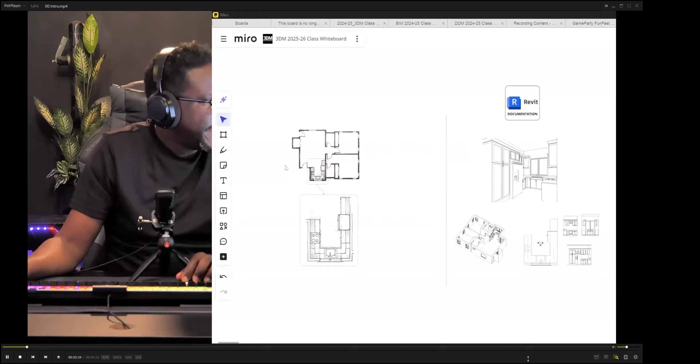Okay, so we have an awesome tutorial today. What we're going to be doing is taking a plan and focusing primarily on the kitchen area. So it's going to be a simple, small U-shaped kitchen. Now what we're going to be doing is developing this in a BIM software, generating floor plans, interior elevations, and essentially generating a BIM model of the kitchen area. Our plan is to design this kitchen in detail according to our design board.

So we have here some ideas for what we want to do with the kitchen. We're going to be taking ideas - for example, we like these lamps, that's going to be over the window. We're going to be taking this barn sink, which is pretty cool. We're going to be looking at the backsplash to be this marble tile, and the combination of colors - this kind of green, gold, along with this light pink floor tile. And for the ceiling, we like this idea of the tray ceiling. So all of this is going to form the basis for detailing our model.

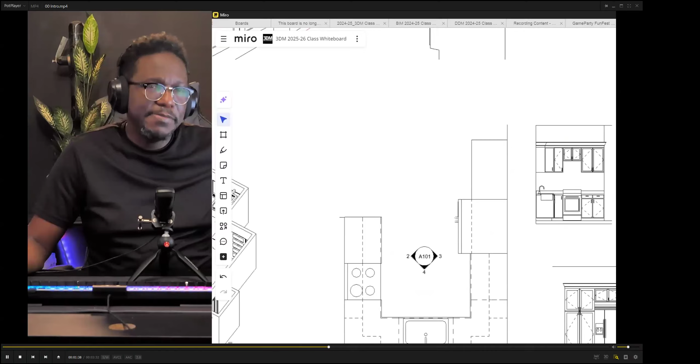So back over to our BIM model. As you notice here, this BIM model is very basic, and the whole point of creating our kitchen in Revit is that we're able to generate our documentation and drawings, which is great. However, when it comes to detailing based on our design board, we're going to move into SketchUp, and this is where we're going to leverage the power of the SketchUp warehouse to get specific types of plugs, types of appliances, types of lamps. We're going to grab the Revit model, take it into SketchUp, and replace some of the flat BIM objects with more detailed objects. That's where we're going to add the sink and all of these things, because most of our BIM model is a representation to give the overall dimensions of our kitchen. However, the kitchen is more than just the overall dimensions - we want to talk about specific lighting and specific types of appliances.

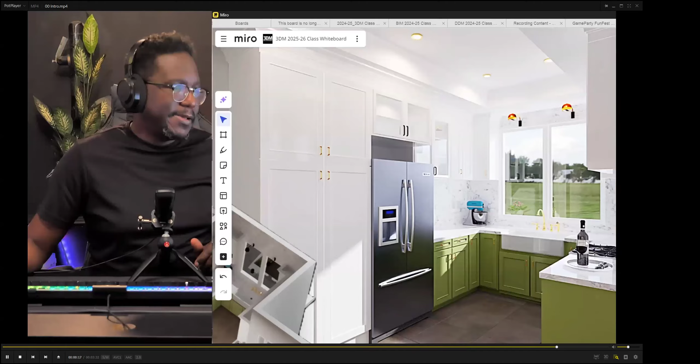So after we detail our kitchen here, then we're going to take it over into Twinmotion, and this is where the magic happens. This is where we're going to be adding things like color, texture - a lot of the color that you see in the design board, this is where we're going to add them. This is where we're going to add decor objects to really bring the place to life. And then we're also going to generate a 3D floor plan along with a few rendered images. So that's going to be our journey today, and it's going to be really cool. So let's get started.

All right. Okay, one sec guys, let's get this show on the road.

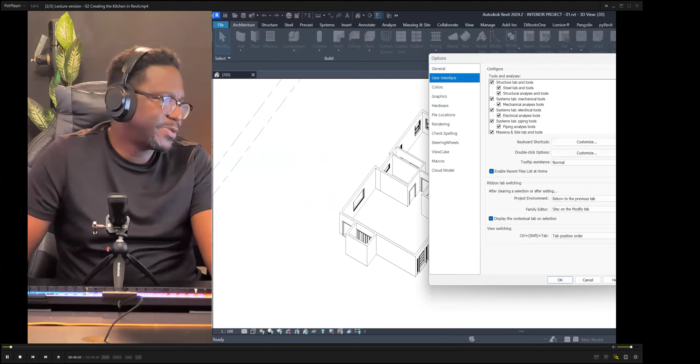So let's get going. I heard some of you have your plans ready, so we're going to dive into some details here and determine how deep we go. We need to cover two things today: the modeling and the rendering, because you'll need that to complete what I need from you in computing. I need you to finish your studio project so you can give me what I need to mark.

If you have your model ready, or at least your plan ready, I suggest you pause and follow along to try to get a grasp on these things, just in case you're not as familiar with Revit, because this directly applies to what you need to do right now in Revit, which is producing your plans. Okay, so let's dive in.

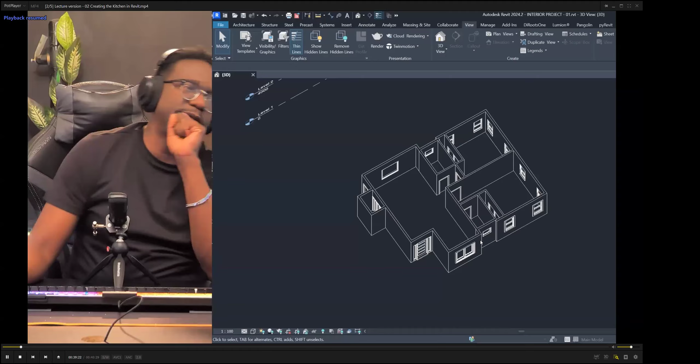All right, so let's continue. One of the first things we're going to do is work on the kitchen area, since that's going to be the most tricky. If we go to a plan view, I'll switch to my level 1 plan. This is the area we want to concentrate on, where our kitchen is going to be. Looking at our reference plan, the idea is to put our countertop roughly in this area, with our stove here, our sink here, our kitchen here, and our pantry in this rough spot. That's the general layout we're going to use, following this reference.

The first thing we want to do is import some cabinetry into this scene. To do that, go to Architecture, then Component, then Load. When this opens, it should default to a specific location. Note, if you're using a metric template in Revit, it will default to the metric folder, but sometimes it doesn't. As you can see, this is defaulting me to the Imperial folder, so check that first. If you're used to metric systems and dimensions, go back up to libraries and choose English, then US — this is now the metric version.

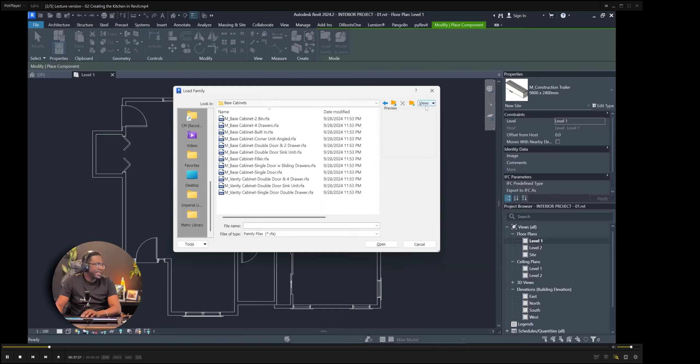We're going to go over to casework, and this is where we see some cabinets. Let's go to base cabinets. You can switch your view over to thumbnails to get an idea of what we want to do here. Great, so what we're going to do is place some base cabinets. Let's grab this one — as you can see, it has two drawers here. This one has no drawer.

This is going to be the one for the sink, so let's grab this one. And then we're going to choose where to put it, so we're going to put that one right here. If you press spacebar, you're able to rotate that, and we're going to drop that right there.

Now from a plan view, you can see just the outline of the cabinet, but when we go to 3D view here, this is where you can get a better look. So we're going to dock this side by side, so that we can see the 3D and have the 2D here at the same time.

All right, great. So now we need 2 corner units here and here. So we're going to head back into architecture, component, load family, and let's look for a corner unit, which we can grab this one here.

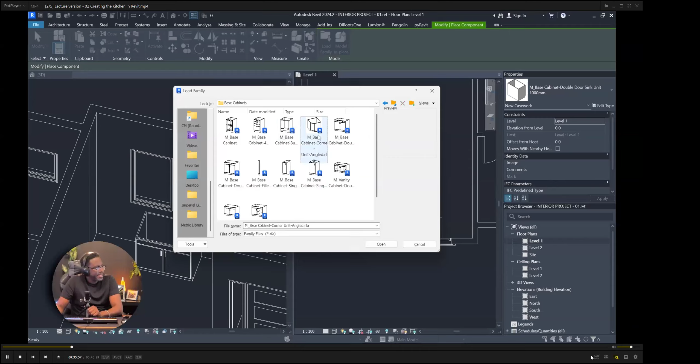Now, before we grab this one here, one important point to note: the metric and imperial templates don't exactly mirror each other. For example, for the metric template, this is the only corner unit we have. But if we head back up to the libraries folder, switch over to Imperial US, go over to casework, and go to base cabinets, you see some other options. The Imperial side has these angular corner base cabinets, while the metric side only has these.

So we're going to use this one from the Imperial set. Doesn't matter which one you use, they're going to come out to be the same size. So there we go, and what we're going to do is just snap that into place. That's right there. All right, lovely.

We're probably going to want these to line up, and in order to do that, we need to go in and change the dimensions. So let's make this side a little smaller. There we go, and let's adjust this. I'm going to use the align tool. Okay, actually we can just drag it.

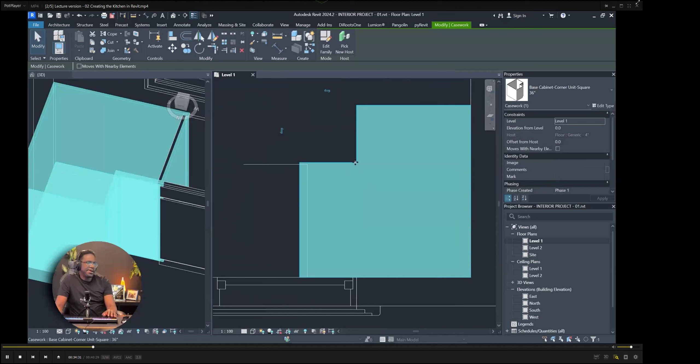All right, so we can see that this corner cabinet is a little large, and also it's not fully aligned with this cabinet here. So if we look in the properties, and then go over to edit type, you can see where we can adjust the height, width and depth. The main reason for this is perhaps because we're using two different units, one metric, one imperial, so that's why you'll see a bit of a mismatch.

If you don't want to adjust this every time, you could just use everything from the imperial set. I tend to do that a lot. So let's go back to component, go to load family, and this time, from the imperial set, we're going to load that cabinet with the one for the sink.

There we go, and you notice now that they're aligned. So this was the metric version, we're going to delete that. And if we work with the imperial cabinetry, all imperial, then everything will line up and we don't have to go into edit type to change them.

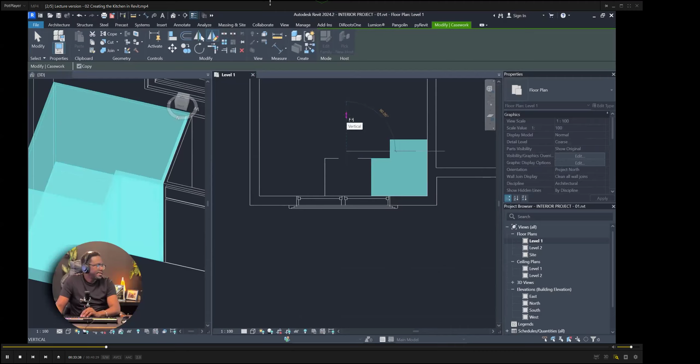All right, so we're going to duplicate this on the other side. We're going to use the mirror tool, and then I'm going to use the align tool to align this here. All right, so now what I want to do is I want this base cabinet to be the full width of this space that's right here.

So I'm going to use my dimension tool and check out this space here. I can see that it's 917 millimeters. I am in a metric scene, even though I'm using imperial cabinetry.

All right, so I'm going to go to edit type, and for my width, I'm going to type 917, and then I'm going to align this. All right, so there we go. We have our base cabinet so far.

Now what we want to do is, we're going to have another cabinet here where we'll have a countertop stove, or we could use an actual stove, a classical stove, whichever version. So let's try the classical stove. So we're going to need to insert another cabinet on this side.

So we're going to go back to component, load family, and we're going to look for one of those cabinets, perhaps one of these base cabinets. We're going to load that in there. All right, now we need an oven, so we're going to go back.

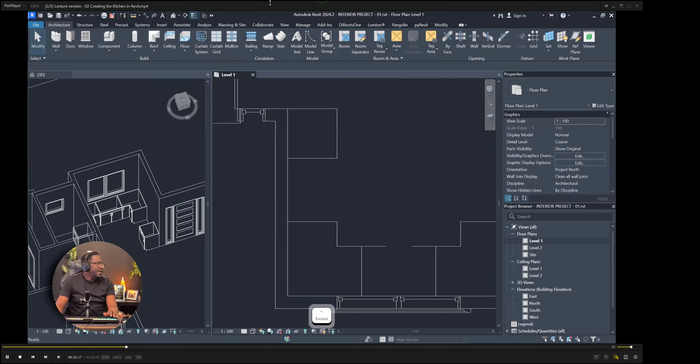Go to load family, and for the oven we would find that under specialty equipment. Then we're going to look under domestic dishwasher. We see an oven top, we see a gas stove right here.

There are a couple options we can pick. Here we go, here's a range, a typical range. So we will grab that one and drop it right there. Then we're going to adjust this to close that up.

So I'm going to use the dimension tool again. So that is 777. I'm going to go into this edit type here and change the width to 777, then go to align. There we go. Now notice all of these are just the base cabinets, and this is kind of how they do things in reality.

In reality, they create the base cabinets before creating the countertops. On this side we want to have a pantry on the left, beside the fridge. We also want to have a hood for the stove and maybe some corner cabinets. So let's start to put those in.

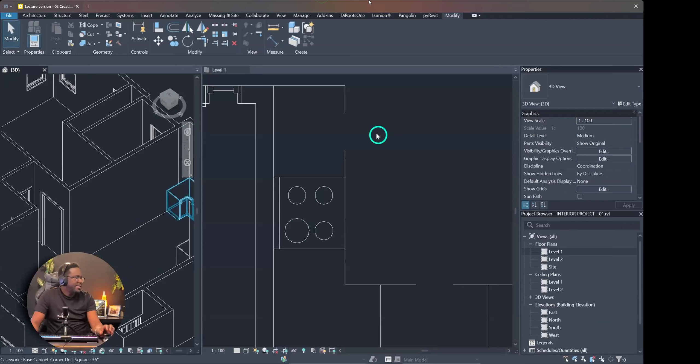Let's see if we can find our pantry. I'm going to go back to component and go to load. Okay, so pantry would be back under casework, tall cabinets, and these are some different sizes. I would use this one. I'm going to rotate that and put that here. That is what it looks like.

Now we're going to want maybe some counter space here, and then we need the fridge. So I'm going to drag this down, and then copy this, CO to copy, spacebar to rotate, and drop this on this side like that. So this is what we're doing here now.

Actually, I think I want to change this to a double door version. So I'm going to go back to base cabinets, and let's look for one that's maybe a double cabinet. I could use a double cabinet with drawers, but this one is good.

Now, because this is actually loaded, I don't have to actually move this. I can see that this is called base cabinet double door one drawer, and I think I want double two drawers. Let's see if that option is there. This is double with two drawers - that's the one that I want.

So what I can do is just go here and swap this out for double with two drawers, choosing this one so I can delete these. Here we go. Now I need to change the size of this one to match it again.

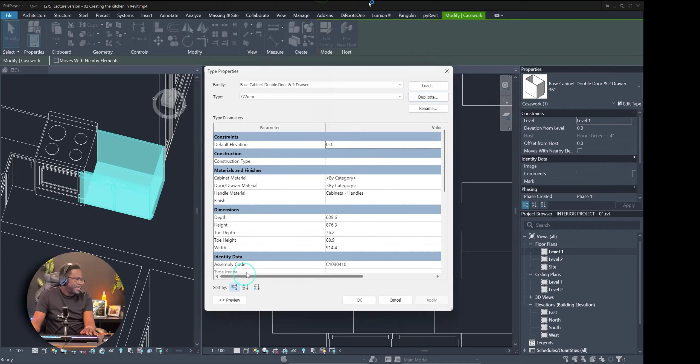It's good practice to always duplicate, so I'm going to duplicate this one and call it 777 millimeters because that's the size I need on that side. So the width here is going to be - there you go. Now I have the double drawers right there.

I think I want to use this cabinet also over here. In reality, whenever you're actually creating this, it's a good idea to repeat the same cabinet in different locations because the construction is much easier, if the design permits. So I'm going to use about the same cabinet on this side, and then I want to have my refrigerator here.

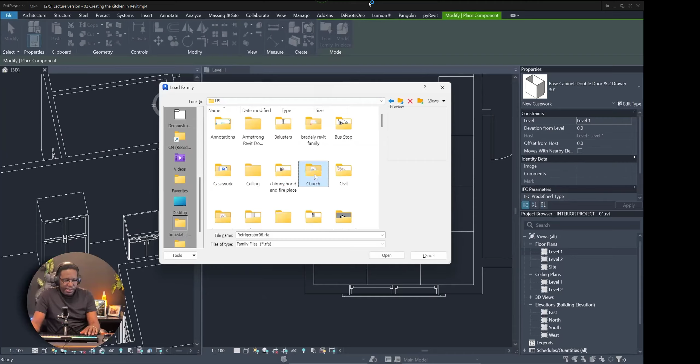So I'm going to go back to component, load family, and back. I'm going to head down to furniture, then kitchens, and there we go. This is a pretty typical fridge to drop in. There we go, and that would be our refrigerator.

Right there. Now what we want to do is have some upper cabinets. So we're going to look for some wall cabinets. We want this wall to stretch above the refrigerator, and we want to have wall cabinets all along the wall here.

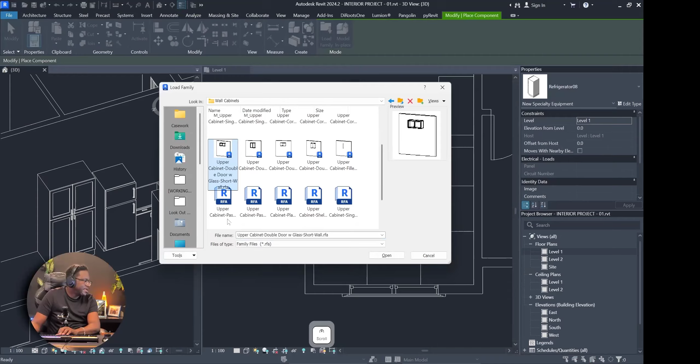All right, so we're going to now look for wall cabinets, and there are some different ones. We're going to grab this one here, this upper cabinet with glass, choose okay, and that one has to be mounted to the wall.

Notice that if I'm not hovering over a wall, you don't see it. So I'm going to drop that one right here, and you can see that's the base cabinet right there.

We're not going to worry too much about details like the fridge style. Usually what we want to do in Revit is get a representation for the purpose of producing floor plans. So if you look at my floor plan now, you can see this is the main objective of Revit. We want to highlight the floor plan and have a basic representation of the equipment.

Now, if we want more custom equipment, like a double door refrigerator that we don't have in our library, we would have to go to another website to find that. There are some cool websites out there. If you just Google Revit Family Library or Revit Family Catalog, you'll find a bunch of websites. One of the more open source ones is Revit City, and it's free to join.

I can just type fridge, and you'll get more options. We can take this large one here, and usually you see a little description. Some will tell you if it's parametric, meaning you can edit it. Fully parametric, side by side, stainless steel, you can adjust height, width, depth, dispenser height. This one seems pretty cool because it's fully parametric, so I'm going to download that.

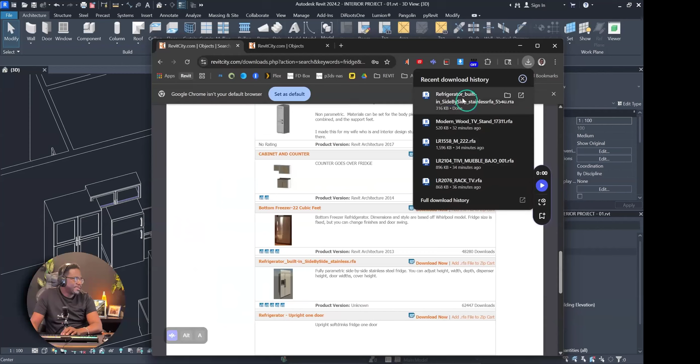I'm going to drag that over into Revit, and it's going to open up in my family editor. I'll say load into... let me see, do I want this one? Maybe this one is a little tall, let's look for some other options. This is the great thing about Revit City, there are usually so many options available. I'm going to load into project and close this time.

Once we have this fridge loaded, we're going to delete this one, press spacebar to rotate it, and drop it in location. We're going to put the pantry right beside it, so this is what we have here. Let's make this a little bit wider. Right, so this is what we have there.

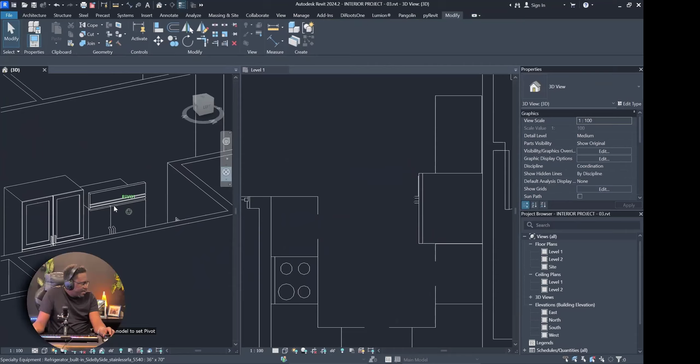Now this fridge has a kind of upper cover, and we can actually change the height of that because this is a parametric refrigerator. If we click it and look in the edit type settings, notice we can edit the width, the height, the cover height — that's this area here — right door width, bottom of dispenser, so we can adjust the height of the dispenser. This is a pretty cool fridge.

Now we need to load our upper cabinets, so let's go back to component. We already had it there, so we're just going to put it back.

Now we need to decide how we're going to do our design here. In some cases, you can have upper cabinets that are very deep, depending on the depth of the refrigerator, and we can do that with this cabinet. Same thing with the pantry, we can make the pantry a little deeper.

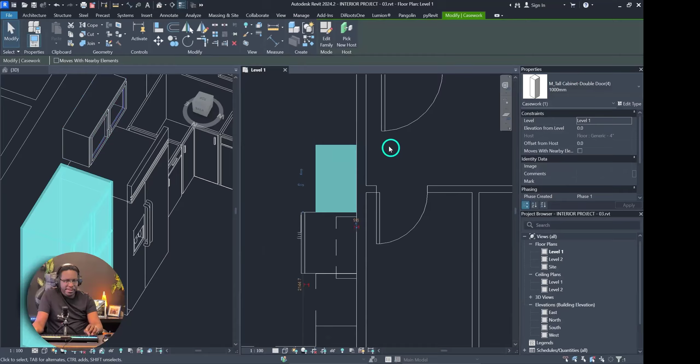What I'd do here is look at the width of our upper cabinet, and the depth. Let's put this back to the wall and take the dimension here. So it's 600, we can duplicate this and say this is going to be 600mm. And then the depth, we're going to make that 600, so now this is the same depth that we have there.

Now the next thing we want to do is make this pantry maybe taller, because ideally we'd want some space at the top of our refrigerator. So what we can do is adjust this top height here. If we go to edit type, right now the cover height is 256, we can make that 150 — let's see if that will work. Right, so now this is actually a little bit lower.

We're not going to worry too much about this because we can change out this fridge if we want. So if the type of fridge we want doesn't have this at the top, we can always change that out later. What's important is that we need to select a height.

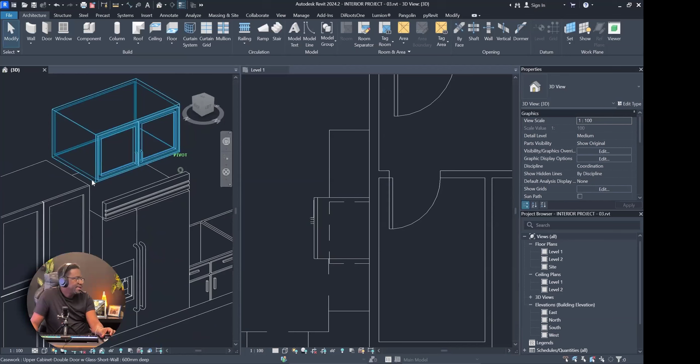So I'm going to work with this, with the height that we have. If I go to my view here, I'm going to draw a section line like this, this way. Notice I get a section marker here. I can click that and look at my section view. So right now, if I go to my dimension tool, this dimension is coming in at 2000.

So let's say we want to use that as our height. What we're going to do is align this here. And then we're also going to make the height of the tall cabinet be 2466. So we're going to go into the cabinet and say height. All right, so there we have the top cabinets there now.

Now we need to have the other wall cabinets on this side and then have a corner cabinet that's going to be there as well. So let's go back to our plan view, and we're going to go back to component and load. All right, so we're going to go back to casework. Remember we saved our folder here, and go to wall cabinets.

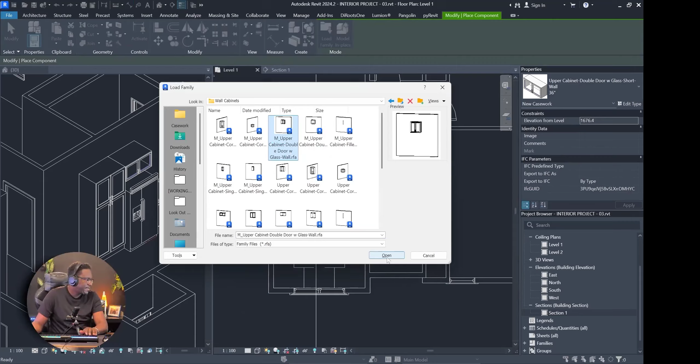Okay, so this one is glass doors, this one is without the glass doors, so we can mix it up a bit. Let's take one with the glass doors first, and it has to be attached to a wall again. So we're going to attach this one here.

There we go, and we're going to manipulate the dimensions of this, and it's good to do this in a section view. So we're going to align this there, and we want this height to be based on real world recommendations. If we take a look back on the Miro board, this is under the tips and guide sections. You will notice that we have some typical dimensions here, some guidelines for kitchens.

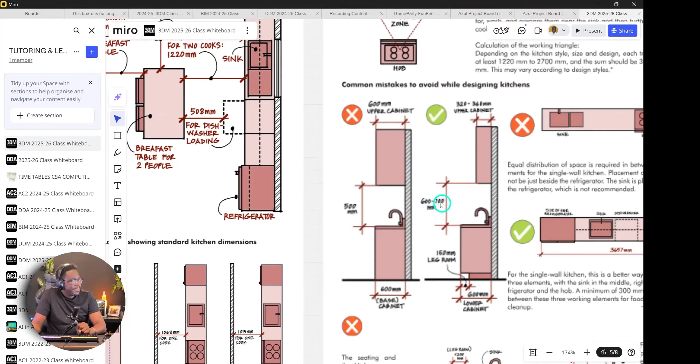We can see that you don't want the height of this to be 500 millimeters. You know, we don't want it to be 500, if you can see here. Instead, we want it to be between 600 and 700, which is what is recommended here. So let's make this 700. What I'm going to do is put dimensions here, and we can make it 750 just to be on the safe side.

And now we're going to change our scale to a little bit smaller. That will make our text smaller. All right, and we know that we want the height of this to be 839. So we're going to go into edit type and duplicate this, and we're going to make this 839 height. All right, there we go.

We also want the width to be the width of this cabinet down here, so 780. So we want the width to be 780, and we're going to align it. Okay, we need to change the width of this one as well to be the width of the space for the fridge. So now in reality, we might want to let these spaces be wider, like to give it a 2-inch buffer around the fridge and the stove, right?

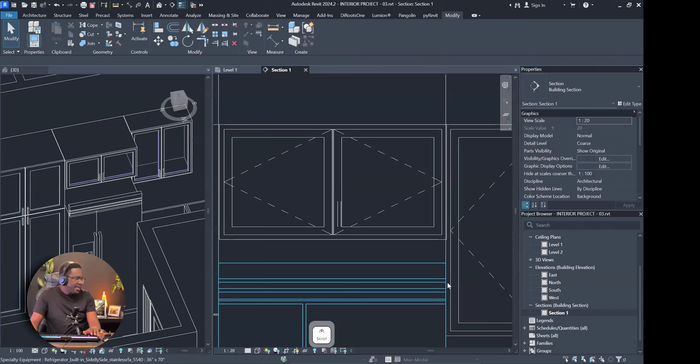So remember that. This needs to be 908. So we're going to change this width to be 908. In this case, we're just going to make it the exact dimension, so we're not going to worry too much about that buffer. All right, lovely.

All right, so now we need to work with the corner unit. We want to put a single unit here and then the corner unit. If we take a look in 3D, this is what is happening. All right, so let's go ahead and load a component, and we're going to load a corner unit, wall cabinet, for wall cabinet corner square, or we could load this angular version. Let's load the square version.

Let's use a plan view to get it in, so we know we want it to be there. All right, and then we're going to need one in this space here. So let's go back to our section view. We already know that we want to align this like that. We already know that the height we want to be 839. Okay, this, always a good idea to duplicate the default cabinet.

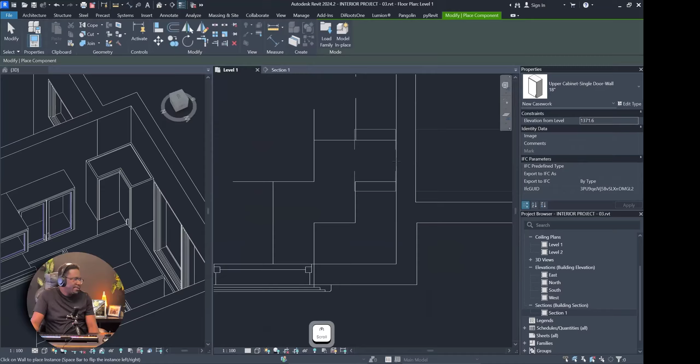There we go. Then we want to fill this space here, so we're going to need a single cabinet that needs to be 303. So we are going to load another one. Maybe we can load a non-glass version. Let's go to our plan view and we're going to load it right here. Let's go back to the section, align this.

And we know that this needs to be 839 by 303. All right, there we go. So we pretty much have everything on this side. We're not going to be putting anything where the windows are.

And we're pretty much going to be putting this same thing on the other side. So we're just going to choose this option, which creates similar, so we can create a similar one on this side. Same thing for this, and we're going to leave a gap here, and put another glass unit here.

I think we need to adjust this a little bit. Right, there we go. All right, we need to double check some of our measurements here just to make sure that this is accurate. So our width needs to be 707. There we go. And we also need to fix the depth, so we want it to be 305 in depth.

That's good, and let's adjust this one now. And this needs to be 308 actually. Let's rename this 308. And then we're gonna align this.

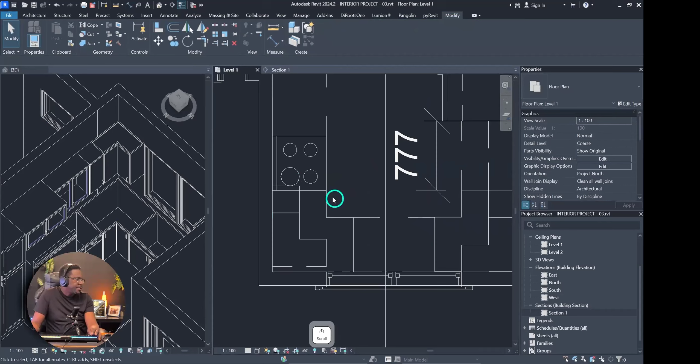All right, okay, so on this side here, we want to put another cabinet over here. So on this side, we can get that there. All right, now we need to align the heights of everything.

So we can actually use our section and we can flip it to this side. The elevation from level, which is 1676.4, needs to be the same here. There we go. And we're gonna align this to the wall and align this cabinet together like that. All right, same height for these guys here.

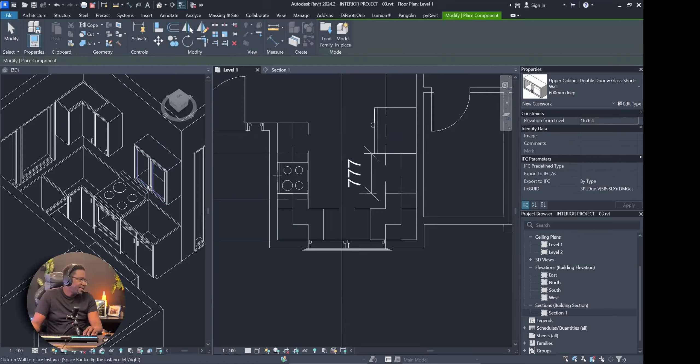Okay, now we need another cabinet here, perhaps with a hood below it. So we're gonna grab the same cabinet that we have over the fridge and place it on this side. But of course, we're gonna resize it.

So from a plan view, we know that we want the depth of that cabinet to be 305, and we want the width to be 610. So we're going to duplicate this and say 305 by 610, that's what we're going to name it. Then we're going to align that, and let's use our section view here.

All right, looking good. Now we could have a microwave here, along with a hood. So let us look for that. We are almost there with our kitchen. Looking pretty good, all right.

Okay, so what we need to do is to go back to Revit City, and I found a nice microwave here, and to download this one. All right, so I'm going to load this one into the project. All right, we're just going to drop it right there.

Oh, there it is, it's actually right here. So we're going to align this right there. There we go. All right, now we're gonna try this one. Let's try the width, 607. Okay, good, and the height, 382.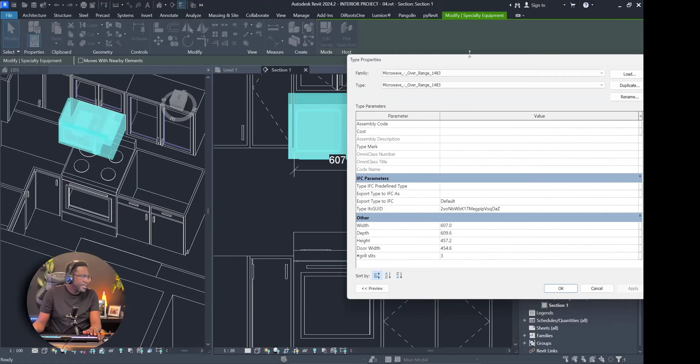Let's make it a little smaller than 382, maybe because we need space for the hood that's gonna be below it. Actually, no, we're gonna leave it at 382 height. Let's see if that works.

All right, great, actually I think these cabinets are possibly too high, so we might need to adjust that. But before we do, let's put our microwave in. Great, all right, let's go from the plan view.

Oh wow, the depth is quite big, so we need to change the depth to maybe to 305. Let's see if that works. Oh, this one, let's see if the arrow will still take us there. Okay, good, it still works. That's good, all right, so now our microwave fits in lovely, and we pretty much have our kitchen cabinetry.

All we need now is the countertop and the sink, so let's go ahead and do that. So we're going to remove these dimensions here.

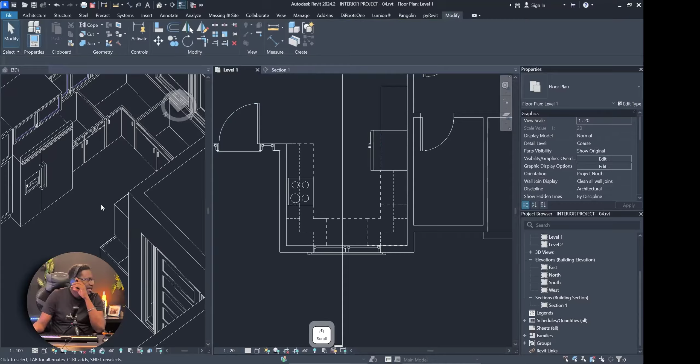All right, now for our countertop, we are going to need a component. So we're going to go to load, and we are going to go to, again, this time we go to casework and countertops. All right, so we have some options here. We have the L and we have the sink, so we need these two.

So we're gonna load these two. Oh, we only can load one at a time. Okay, so let's load the L first. It's actually here, let's align this properly.

And we can actually adjust this in real time, so align. And for this side, we're gonna align it to here. And then we're gonna mirror this, mirror copy. We're gonna push it all the way to the back. There we go, in this case, we need to adjust this way.

And then we're gonna need another counter, so we're gonna go back here, go to load family, typical countertop.

And then we need to load the one with the sink. Here we have one with the sink. Put that in. We are going to try and move this to the center.

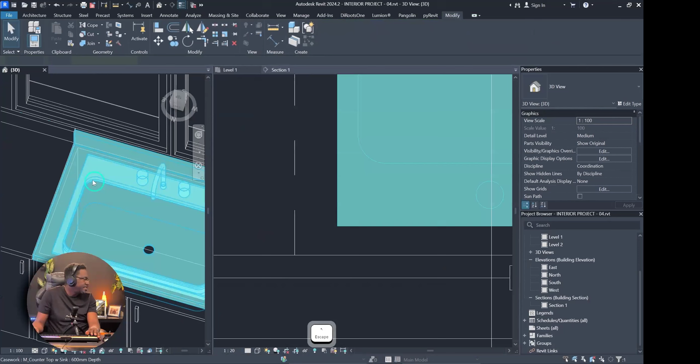There we go. Now this height is a little different and the depth is a little different, so we need to change that. The height here is 914.4, so we need this to be the same height. There we go, that's good. We also need to adjust the length, so the depth is 635. So this depth needs to be 635. All right, there we go.

All right, and if we look there, you can see that we have our kitchen pretty much completed.

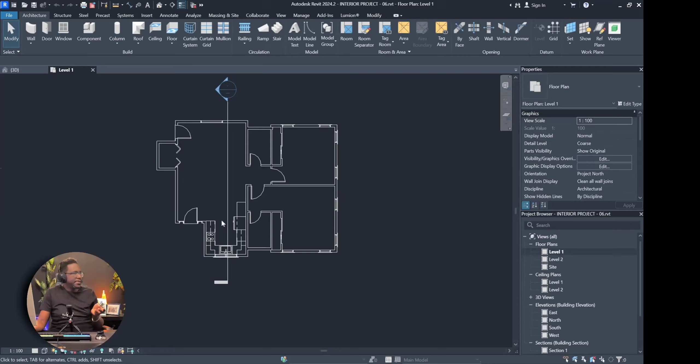Okay, so now that we have our model complete, let's talk about how we can set up the sheets to have our drawings laid out for plan and our internal elevations. So what we want to do now is go to the plan view, and if you remember, we had drawn this section here which we were using to help us out when we were creating the cupboards. Now we're not going to need this anymore, so we're going to delete that, and that's fine.

And what we're going to do is create a sheet that we can have for our floor plan and interior elevations as well. So one of the first things we're going to do is create some interior elevations, and we also need to create some sheets. So I'm going to scroll down here to where it says sheets, and I'm going to create a new sheet.

Notice that I have a default sheet here. Now if this is not the sheet that I want, I'm going to go to load, and I'm going to be taken back to my Revit library. I'm going to look under title blocks, under annotations, then title blocks, and here you will see some different sheets. So I'm going to take the A2, A3, and this is the A4 vertical—maybe the A3—and I'm going to open that up and choose OK.

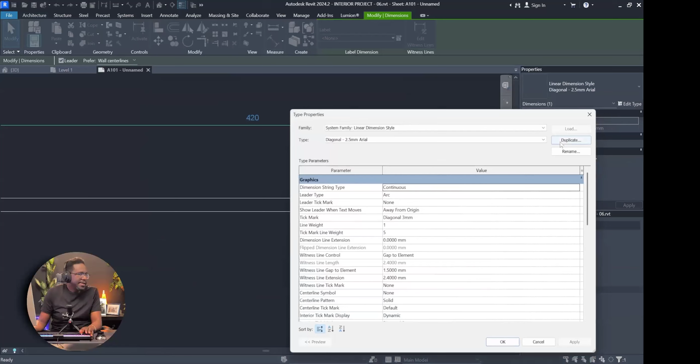All right, now this is an A3 sheet, and we can use the dimension line and draw a dimension here to get the idea of how big this is. This is in millimeters though. If I go here for my dimensions, I go to edit type, and I can say show me alternate units below, and show my alternate units to be inches. I can use the inch symbol, it's okay. Right, so you see that this is 17 inches by 12. So this is 12 by 17.

Now, regardless of whatever template you choose, it doesn't matter. If you did not have this particular template, it doesn't matter, because we're going to pretty much create our own. So what I'm going to do is edit this template family, and I might want to keep some of these, but maybe not all of them. I'm going to keep project name, sheet name, and scale—I'll keep all of these. Probably the sheet name and drawing scale. Now everything else I'm pretty much going to delete, and I want to make this size here to be a letter size. So I know that in order to do that, I would want to enable alternate units for this one as well.

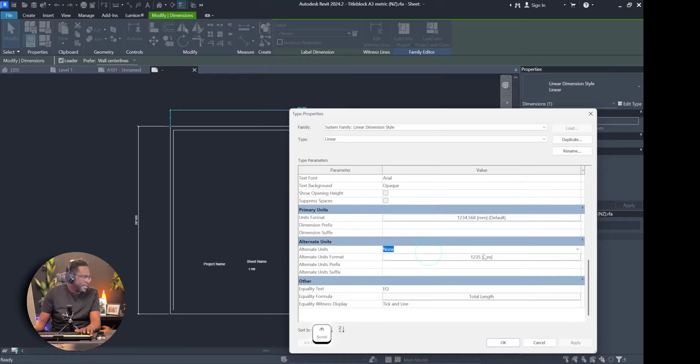So I'm going to say alternate units below and show me inches. There we go. Right, so I know I want to make this here 11 inches, so I'm going to say 11. And for this one here, I'm going to say 8.5 inches. So I know this will be the size of our letter size. Now I can just get rid of most of these lines, and I'm going to keep the project name, the sheet name, and the scale, and that's it.

Let me delete these, and this is going to be my new sheet template. I'm going to save this family, so I'll go to save as family, and save this one in the folder I'm working from. I'm going to create a folder on family, and name it there, and I'm going to call it title block letter. So there you go.

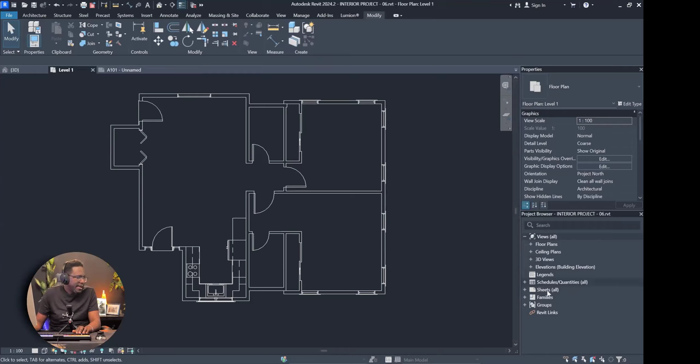And I'm going to load this into my project. So now if I go to sheets here, I can click on this and change it from title block A3 to title block letter. I'm going to delete these dimensions now, so now I know that this is letter size, which is great. Regardless of if you have the title block family that I have, I never used it anyway. I just deleted it and created my own. So this is all we want to do for this one.

Now what we want to do is drag the floor plan. So I'm going to expand floor plan and drag level 1 onto my sheet here. You'll see that this is 1 in 100 scale. Now we want it to be large enough just for our kitchen, so we're going to click on this window here and change the scale to a bigger scale, maybe 1 in 25.

There we go. Now the next thing we want to do is crop this down. So we're going to double click this, show our crops here, and crop this down to just the kitchen. There we go. We're going to double click back out, and then put this on our letter size sheet. We could probably crop it down some more, let's crop it all the way to the wall, and let's leave that window intact.

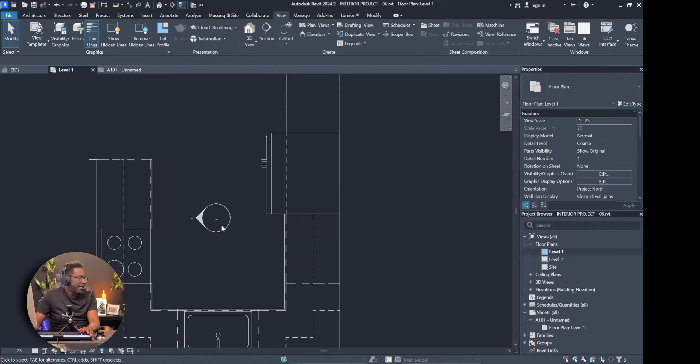What you have to do is click on the circle, and that part is going to be important. You need to click on the circle and not the arrow. So clicking on the circle, we want to enable this elevation and enable that elevation. Now we don't want to enable this one because we just want to see these three elevations. Once we enable them, if you look over here under elevations, you see that they are already created. So if I double click this, this is what that elevation looks like. Then we have this one, and then we have that one. So all these elevations are already created.

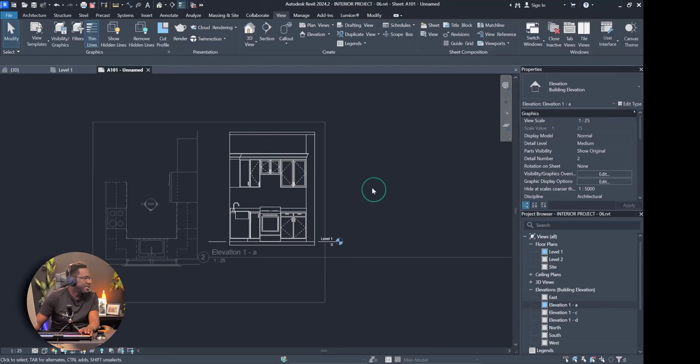Now let's close these. We're going to go back to our sheet here, and let's drag the first elevation onto our sheet. Right away we know that we just want this part of the elevation, so we're going to double click, turn our crop on, and crop this all the way down here, just to there, because we're showing internal elevation, so we don't need to show the wall section. Maybe just to here where we can see the top of the wall. Now we also have a title here. We can leave it right there.

How the title works: if you click on the image on the viewport, you will see the end of the title line comes up, and then you can just drag that and position it on your sheet. Now, if this is too big, what you can do is make it smaller. I can click on this and make it 1 in 50. So there is one elevation, that's right there.

I can choose if I want to have the title or not. If I click here, I can choose the viewport that says no title, and then it won't get any title.

All right, now for the other views. I want to do the same. I can drag this view out, click on it, change it to 1 in 50, and adjust my boundaries. There you go. Let me turn off the boundaries here.

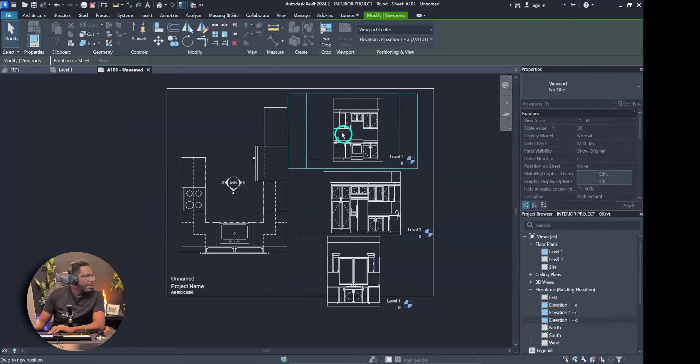Let me do the same thing for this one. Let me turn the boundaries off, and I'm also going to say no title for this one. And then my last elevation, I'm going to drag on here, which is going to be this one. Same thing again, I'm going to set that to 50, adjust my boundaries, and say no title. Now I could probably put these two side by side, perhaps.

And maybe what I want to do is disable the level. So I'm going to right click and choose hide. Same thing for here, hide, and same thing for here. So there you go. Now I'm also going to change this canvas theme to white, because this looks more like a drawing. All right, so that is pretty much it.

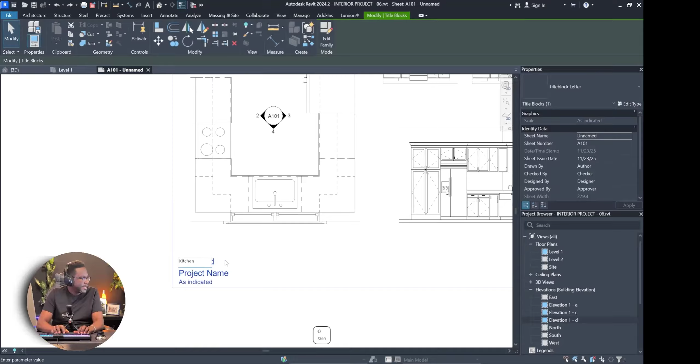So that is how I would get my internal elevations. And if you notice, your internal elevations is already telling you that elevation 2, 4, and 3 is located on sheet A101. So this is good stuff, and I could go ahead and name this sheet. I could call it Kitchen Elevations, or I could just call it Kitchen Design.

Now, the thing we must understand is that doing your drawings in Revit isn't about trying to detail exactly what these cupboards will look like. Revit gives you the ability to have your drawings laid out in a way that works for documentation. So at this point now, I can start to add things like dimensions and labels and all of that stuff.

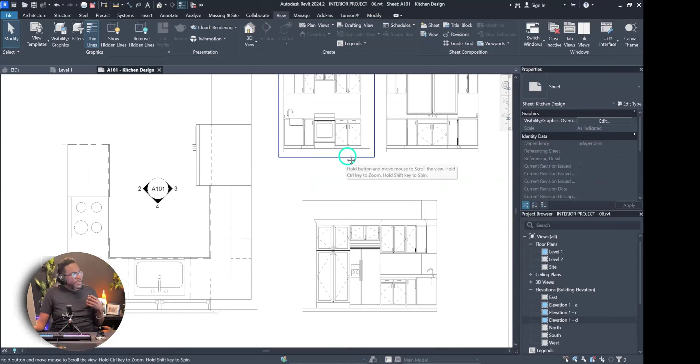However, when you're doing a kitchen design, you might want to go in more detail - for example, what type of handles are we using, what type of stove, what type of sink. Most of the furniture and cupboards we selected here are pretty generic, and that's the idea of using a BIM program. Now, the next stage will be adding those decorative details to the kitchen, but doing that in Revit would be mostly difficult, because Revit is really made for you to generate construction documentation. The next layer we'll add to this will be decoration and detailing.

All right guys, so that was just a quick demo now of using Revit, specifically in your case, which would be to lay out your plans. Now, I just laid out the kitchen area, but you guys would just do the same thing to lay out your living room, bedroom, and all of that.

Any questions from anybody so far? Guys? Is there, do we take a little slow down, catch up maybe? Can you slow down for us to catch up a little bit? Oh well, sure, we have to balance it, because A, the video will be available, and B, we have one more thing to go through. So, you have any specific questions about what you want to know? Nah, not really sir, it's just trying to follow. I know that I'm going fast, but we have to kind of do that because we have to cover this in this class, right?

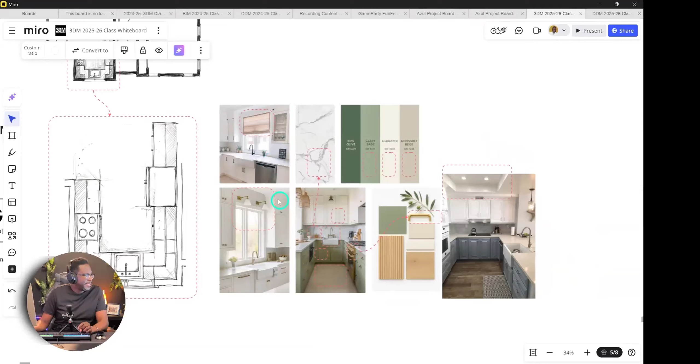So after we achieve the general design, looking back at our design board, there are some specific things we wanted to do. For example, we wanted to use specific lights here. We wanted to have this particular sink, and we wanted specific handles.

We already selected the type of handles we want to have, and we wanted to represent the type of equipment. Notice this is gold-plated, and the faucet has a particular style. The knobs have a particular style, and the cupboards also have a particular look.

So this is where you need to balance between using a program for drawing documentation and a program for detail designing. Revit will give us the overall dimensions for our kitchen, but it won't give us the exact decor or the exact cupboards that we plan to use.

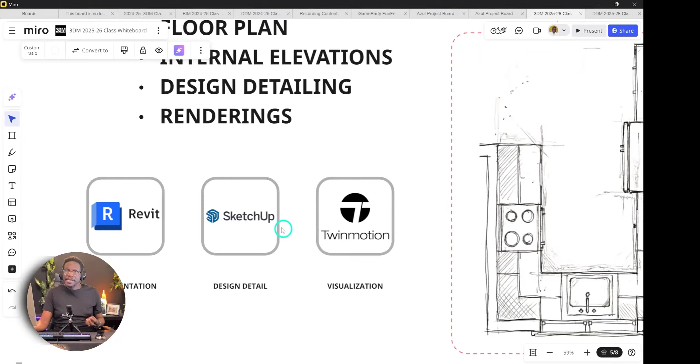Now we could use Revit to do that, but what we'd recommend for this workflow is to go into SketchUp to put in some of these special decorations for our kitchen. After that, we're going to take it into Twinmotion, and our renderings will look quite nice because we'll have added all of those details from SketchUp.

So let's go ahead and jump into SketchUp so we can start adding some of these details from our Revit model.

Now back in Revit, what we plan to do here is export this as an IFC, and that's how we're going to take it into SketchUp. So we're going to go to File, Export, IFC, and we'll get this dialog box that comes up. We can leave pretty much everything at default.

We're just going to browse to choose where we want to save this file. We'll save it in IFC exports and call it Interior Project 06, then click Save and choose Export. Now once you do that, the IFC file is there, and SketchUp can read IFC files pretty well. So what we're going to do now is jump into SketchUp.

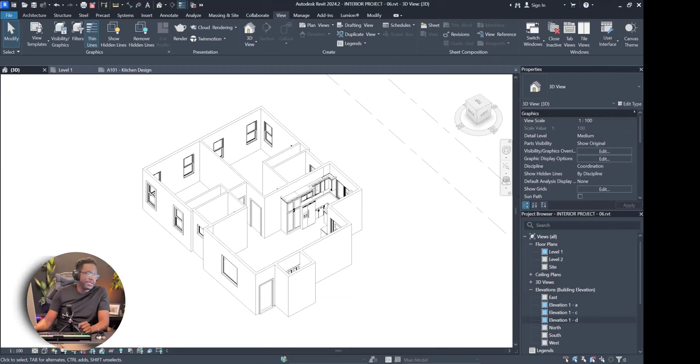Okay, so once we open SketchUp, we're going to get presented with the welcome screen. Now this that I'm using is SketchUp Pro. When we look at the different units we can use, we're going to choose millimeters to be consistent with our model, and it's going to open up like that.

Now your SketchUp might open differently. Notice I have all of my tools here because I've gone into View, Toolbars, and I've enabled a large tool set. All right, so the first thing we want to do is import our model.

So we're going to go to File, Import, and we're going to go to our folder and choose Interior Project 06, and we're going to choose Import, Close, and there you go. So this is our Revit model now imported into SketchUp, and you can see SketchUp did a pretty good job of importing it. You can see the scale is pretty much on par.

And now we can really use the freedom of a modeling program to add in any finer details that we might want. Because this is inside, one of the first things we want to do is go to View or Camera and adjust our field of view. I want to pull that back so we can have a bit more to look around.

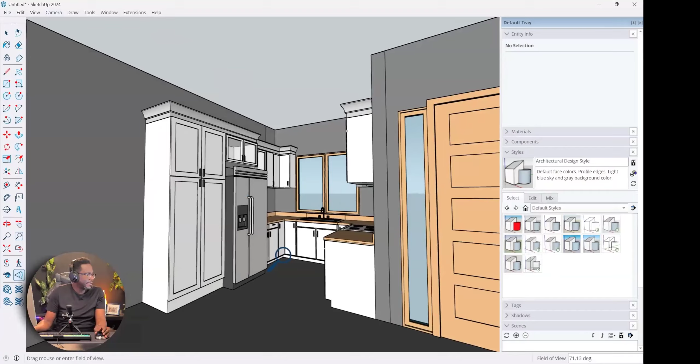Now we're only going to be concentrating on the kitchen area. I want us to take a look on our design board that we had here, and if you notice, we had actually picked out some ideas that we want to execute here in the design board. So one of the first things is that the type of cupboards Revit has is very plain, and we definitely wanted to use this kind of style.

So the advantage of being in SketchUp is that you have SketchUp 3D Warehouse at your fingertips, which is a great resource we can use. If you head over and just type 3D Warehouse and look for it in Google, it will be the first thing that pops up. Now you do need to sign in, which is free, so you can just make an account and sign in.

For example, we might want to look for cabinet doors. We do get a couple of options here, and we basically just want to look for a cabinet door that looks like the style we would use. Here are a few here, cabinet doors. Let me see if this one is okay. I'll just click here, and we can click download, and then we can actually just drag this directly into our model like that, and we can inspect these cabinet doors.

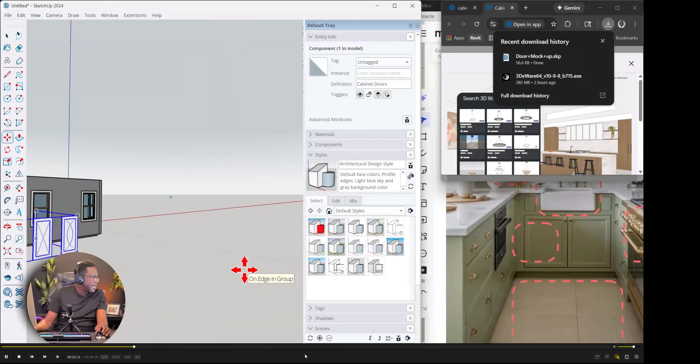Let me look around here. They're okay, but not quite the cabinet doors that I would want. So I can just undo that and we can continue looking. I'm going to hit back. Oh, I can go here. So this is basically the process that we would do, we would try to find cabinet doors.

So if we look around, we can see this cabinet door is pretty good, so I'm going to download this one and drag this one in. And this is actually looking pretty nice, it has a little bit more detail that you can see here. This is the thing that will let the renderings look really nice because it has these details. Now you can see that the default cabinet from within Revit doesn't have that much detail.

So the other thing you might see happen when you're in SketchUp Warehouse is after every 5 downloads, it will pop up a message saying you've reached your daily download limit. Basically, you just need to watch the first part of an ad to get more downloads. So when it says you've reached the limit, don't think you can't download anything more for the day. You just need to play the ad, it's basically advertising SketchUp, and as soon as it reaches about halfway, you can skip it and then you have 5 more downloads.

So, of course, SketchUp is just encouraging us to purchase a subscription. But you don't have to purchase it, just know you have to skip the ad. But we're all used to this already, right? That's how the world of cell phones works. When you download any free app, you know it's coming with ads.

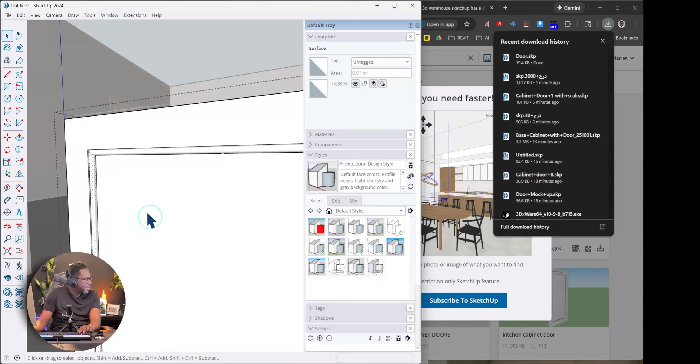For drawings, that's no problem, but if we're doing a presentation, we need more detail. If I double-click this, I see it's one group, and this inside part is another group, so we're going to merge all of that together. I'll double-click and explode this group, so now everything is one group, and I can adjust this by moving one side, keeping everything proportional.

So now I'm going to use my move tool and just move this into place. I'll put it about right here, right here, let me put this here. Then I'm going to rotate this so it's exactly there, and then adjust this. I'm going to select this side here.

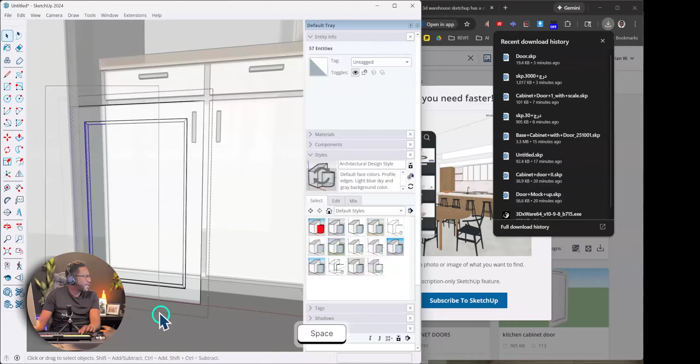If I can't see through this, I'll go to View, Face Style, and change it to X-ray so now I can see it. I'm going to use Move, drag this over to there. I left a piece behind, let me go again. I'll select everything and drag this over.

I have some pieces here, I'll just adjust, and that should be okay. I'm going to leave that part there because that's inside. Now I'll go to View, Face Style, and turn off X-ray. So now I'm going to replace this, I need to carry up the bottom part, like that, there you go.

Then I'm also going to adjust the depth. Here is the back, I'll double-click and push this flush like that. Now all I need to do is replace the Revit version, so I'm going to copy this and press Ctrl to copy it over.

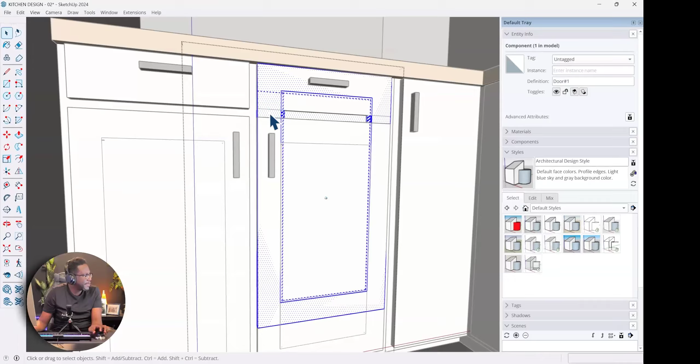There you go. I also have some drawers that are going to be up here, so now I'm going to move this, copy this, and this is going to be for the drawers. Here. Now I want to make this unique because I'm about to change this height, so I'm going to change the height. Notice the drawer is a bit more slim, so I need to make this a little smaller, using an exact measurement.

So I'm going to move this about 30 millimeters, and do the same down here, moving it about 30 millimeters, same for this side and same for this side. Then I'm going to move this all the way up, there we go. Then I'm going to copy this one over here. Now let's see how that's turning out.

So I'm going into the group, the IFC group that came from Revit. Everything is grouped together, so I'm going to right-click and say explode, and explode again because they're grouped multiple times, and explode again, and everything is still grouped, so explode again. Now I'm able to go into each object.

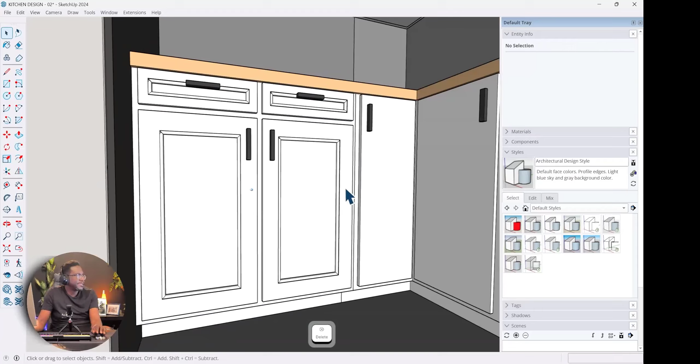So now I'm going into this object that's here, and if I delete, oh well, it's going to delete the cabinet. So I need to go into this and say explode, and now I'm able to delete each cabinet. So now I'm left with this along with the handles.

Also, another point, when you export your model as an IFC into SketchUp, IFC will not take everything sometimes. In this case it took all the cabinets and everything, so that's good, but I believe some items like curtain walls and some types of furniture, for some reason the IFC doesn't read. So that's a point for you to note.

All right, cool. I'm also going to delete the handles as well because we're going to be using our own handles. So we can see that this kitchen here is looking much more detailed, and if we take a look at our design board here, you can see it's looking similar to what we have for our kitchen design board.

But now, before we go any further, let's put on our door handles to match what we have in our design drawing. We want to use these types of handles, so we're going to look for that, and if we type door handles, should be able to, here we go. So we're going to download this one in, and then we're going to move that into place.

So we're going to use the move tool and just place it there. Now, of course, it's a bit oversized, so let's rotate that 90 degrees, and we're definitely going to scale it down. I think it comes out too much, so we need to take it inward on this side.

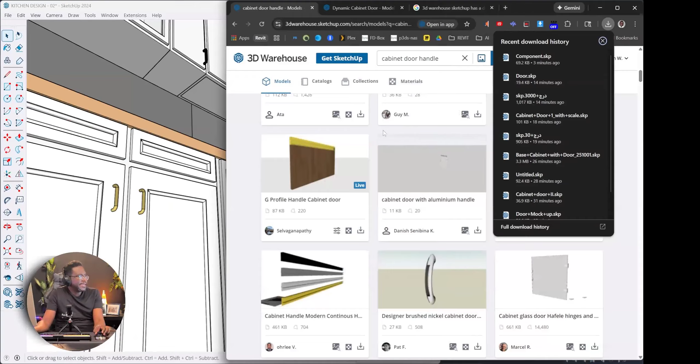Now we're going to place these handles on our door. Still a little too big, so we're going to scale that down. There we go. We're just kind of eyeballing it a little bit, so we're going to copy this over here. And that's okay, because what we're doing is trying to design this in detail, based on our design sketch that we have here.

So we are using these cabinet door styles, but we want to use this type of handle. Now, as you can realize, Revit would not give you this design flexibility. So this is why we would do this using SketchUp, so that our kitchen can have some nice details for our rendering.

And then we're going to copy that over here. Doesn't matter if it doesn't line up 100% with the center. This is okay, it's kind of a sketch. Now, if this is looking like what we want, then we would want to select these two here.

We would actually cut this, go into this group, and then paste in place. Let me delete this. So what happens now is that these are exactly the same because we've added this to the group. And then we can mirror this that way, like that.

And we can do the same thing here. We're going to cut this, go into this group, and then paste back in place. There we go, so now these are grouped. And now we can pretty much duplicate these in different locations.

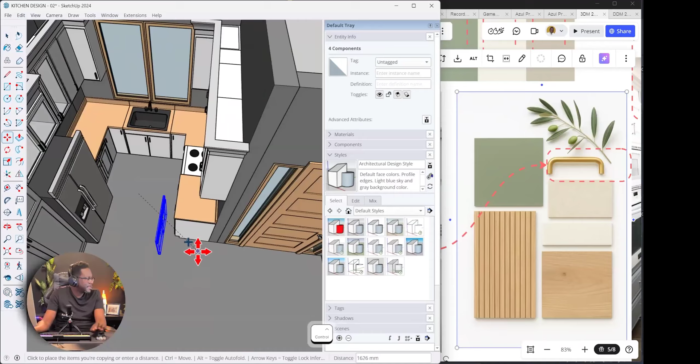So we have a similar cabinet on this side. The first thing we're going to do is copy all of these doors. Then we are going to flip it, using the flip tool there, and then move it in place right there.

There we go. Then we're going to go into this group and explode it, and then delete the original doors. All right, that's looking pretty nice. Now let's go ahead and do the other doors.

So we're going to replace this one here. We're going to copy this, and then right click and make this unique, and move this side in. We had to make it unique, or else these would have edited over here too.

Select this here, and then we're going to move this upward. There we go. And we're going to explode this and delete this door. So now we have that.

And now we're going to do this, and we're going to do this side here. So we're going to make it that way, and then rotate it, and then move it in place.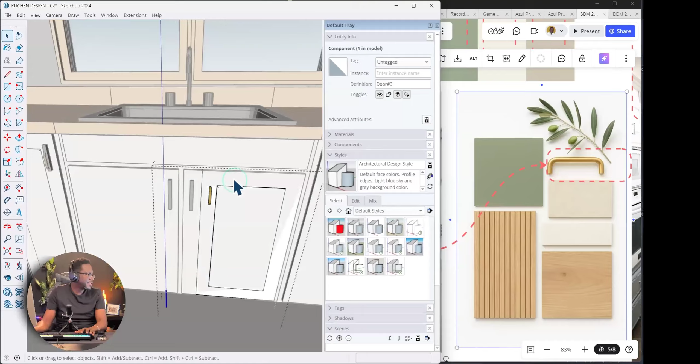Great. Now we're going to do the same thing for these guys here, and these are a little bit bigger. So what we can actually do with this one is make it unique, and then extend it. Then we're going to mirror copy, so we're going to press Control and then mirror.

Actually, we're going to click, hold, and drag this to the center point and then release. And then we have a mirror automatically.

Pretty cool. All right, then actually for here, we're not going to edit this just yet because we're going to edit the sink, and that might change this part. So we're going to leave that for now.

We're going to change these ones up here. Copy that, mirror this way, and then mirror it that way. Then I'm going to make it unique.

All right, then we're going to do this one. We're going to rotate this, and create a rotated copy. There we go here. And then we're going to rotate this, copy.

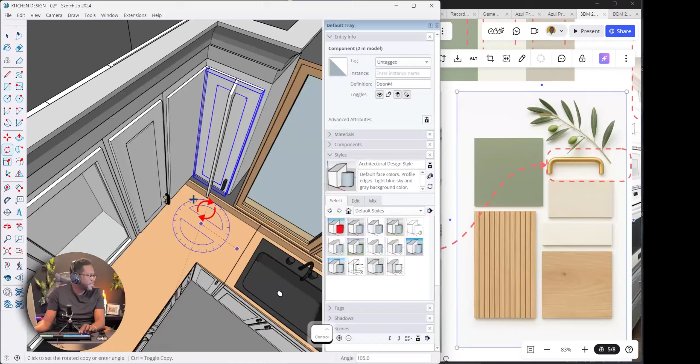Okay, all right, so let's delete these doors. We're going to explode this and then delete that, and delete that door. And I believe all of this actually rotates.

So we are going to make this unique, and we are going to move all of this and do the same thing for this one. Then we're going to remove that. There we go, all right, so that's done.

For these, we could choose to replace these low detail versions, but it would look pretty similar. Let's finish these over here. So we're going to select all of these. We have this one remaining. We're going to grab these guys here, make one unique, grab the back of this guy and push it all the way there. Then we're going to mirror this, copy this upward, and make this unique.

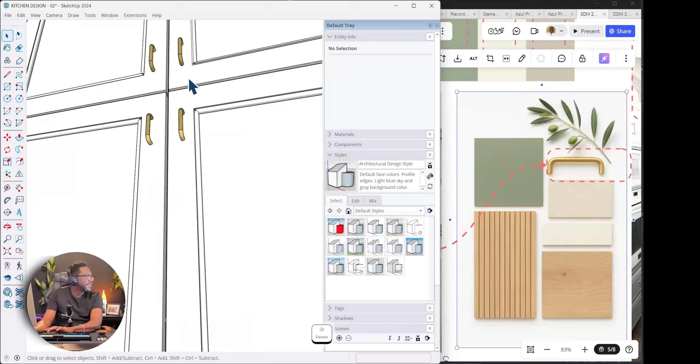That's good. Then we're going to mirror this on the other side, using the midpoint to mirror copy. There we go. Now we can explode this cabinet and delete. There we go, that's looking nice.

So we've went through - hold on, we have to do one more. This guy here, we're gonna explode that and delete that, and we need to replace it with this version here. So we're going to mirror copy this. All right, that's good. So we can see we have added some interesting details to our kitchen.

It's looking much nicer. Okay, now we need to change out some of the fixtures. We have a fridge here, and we have a stove, so let's look up some stoves. Okay, now we're gonna look for some stoves.

If we type the word stove, we'll see a bit here. This looks a little big, this one might look good. So we're gonna download this one and drag that in. There we go. We're gonna delete this stove and replace it with this one here. It's a bit nicer, all right good.

Now this might be a little shorter, so we're just going to make this a bit taller like that. And what we can do is adjust the feet. I'm just going to carry this down and then carry up. There we go, all right, so we have our stove in.

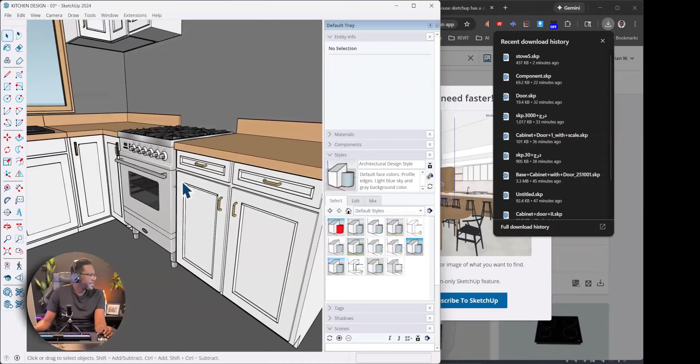All right, so let's look at our sink now. This type of sink is called a farmhouse sink, or an apron sink. So let's do a search for that. We have quite a bit of options here. Let's look for farmhouse sink, see what that gives us.

All right, great, so we're gonna download this one, and there we go. Basically what we want to do is replace our sink that came with Revit, so we're gonna delete that. We're gonna delete everything, leaving the doors, and try to fit this into that space. So we're gonna grab this. It may not fit exactly, but it's pretty close. That is good, that's good.

All right, so a couple of things we need to do to fix this in place. This is actually a pretty nice fit. Let's adjust the base here. So let's hide our doors. First thing we need to do is adjust this base.

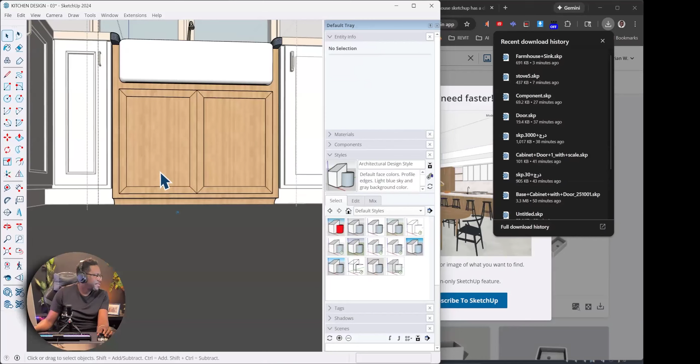So we want to select here and move that there, then we want to delete these doors. Now I'm deleting it partially because I don't want to accidentally delete the front face. All right, that's good.

The colors - okay, so this doesn't come out as much, but I think that's the style of this sink here. So I'm going to unhide, and then I'm going to adjust these doors. We can always change the color of this when we render.

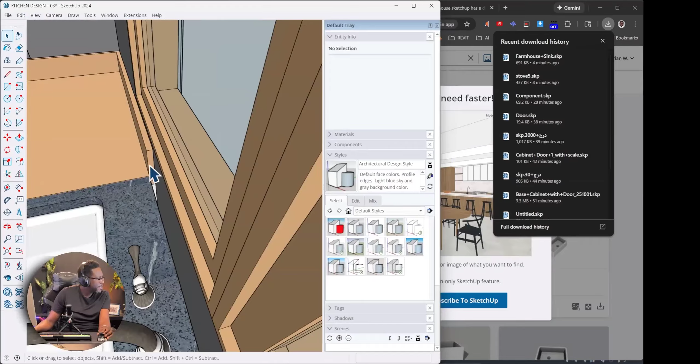We do need to continue our backsplash, so I'm going to do that here. I'm going to double click and grab this and just extrude it, use my pen tool to cut this, use my line tool, cut that. Now I'm able to push this out. There we go, all right.

Now we have our sink to match our design board that's here, so we're doing pretty well. Now let's continue the backsplash here - we're going to do the same thing. I'm going to use my line tool and then push this. We're doing all of these edits here because when we go into our rendering program Twinmotion, it will look even nicer with all of these details.

Our microwave didn't come over from Revit, so we're going to do that - we're going to download a microwave and also possibly a fridge. This fridge came from Revit, but I'm pretty sure we can get some nicer refrigerators from Sketchup. So let's take a look.

Okay, so if we look for a refrigerator, these are pretty good. Let's download that one, let's drag that in. All right, great, so we're going to just align this. I'm going to grab the corner.

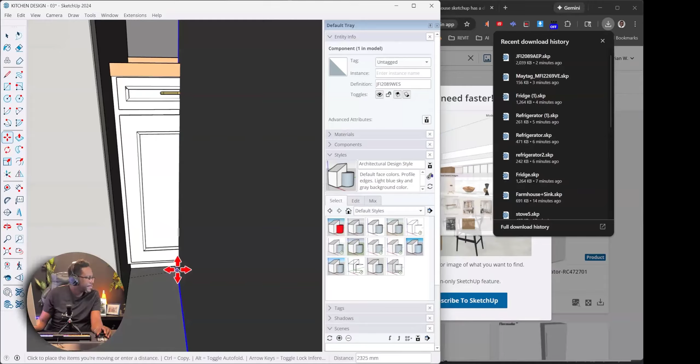Drop it right there. So we can get rid of the fridge from Revit and move this fridge in like that. This fridge is a little smaller than we had here, so we could choose to modify it from within Revit, or we can change it here, but we're just going to leave it as is for now. This fridge is a pretty good fit.

Now that we have the fridge, the stove, and the sink, if we look back at our design board, we did have some lamps we want over here. However, we did want a tray ceiling, with the idea being to have the ceiling come all the way to the top of the cabinet. We didn't put a ceiling in from within Revit, so we could choose to do that, but because we're here, we're just going to continue with SketchUp and put a ceiling.

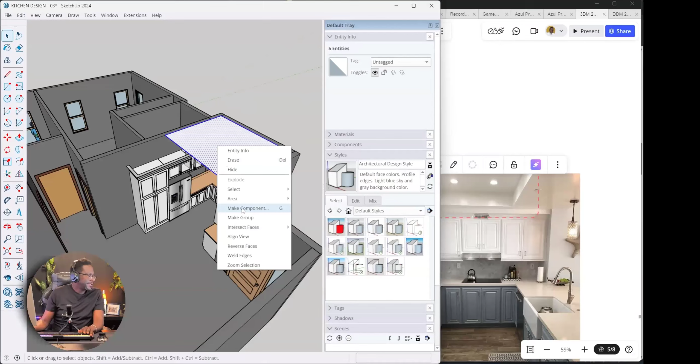So we're going to draw a rectangle like that. Before I do anything, I'm going to double click this, right click, and turn it into a component so it doesn't get stuck to any other geometry. Then I'm going to extrude this downward to the surface here, and extrude this outward to there. I'm going to use my pencil tool and extrude this.

Now I am going to cover everything here, but we're only going to be focused on this area for our views. So I'm going to extrude this all the way to here, and do the same thing here. I'm going to draw a rectangle inside here and extrude it this way. Then everything else, I'm going to cover up with a rectangle, because we do need to cover everything so that light doesn't get in for our render.

Carry it all the way over there. Then I'm going to turn this into a component as well, and extrude it downward. Looks like that's fine. Let's also do this space here, so rectangle inside here and extrude this outward.

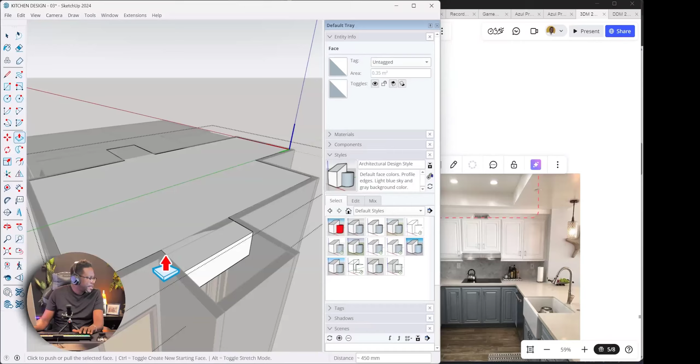All right, so now we have a ceiling. The idea is that we want to have a tray ceiling in the center. So let's use my tape tool, shortcut T, and I'm going to draw off here. I'm going to put that. I'm going to draw off here and align this like that, and then do this one.

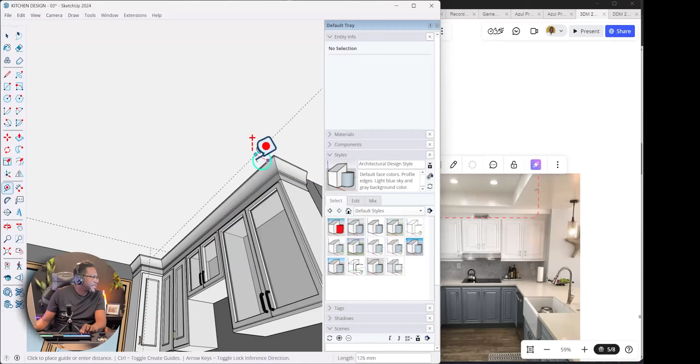Make sure that I'm on the axis. All right, so I want to start here, so I'm going to draw off one like this. Create another one like this. This is a good use of the tape tool—it can help us align stuff properly.

Now we do have to come out some more because this one is here, so we're going to have to come inward. I'm going to offset this 120, and offset this 120 as well. Then I go into this group and draw a rectangle like this. I'm going to push this in 1 foot—maybe 1 foot is too deep, let's try 10 inches. There we go.

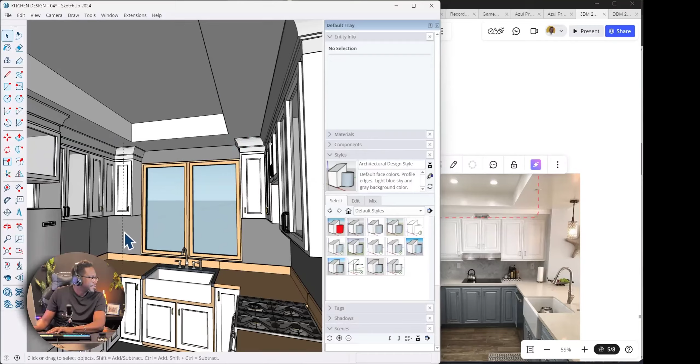All right, so now we're going to remove these lines. Well, I'm going to keep it and save just in case I need to come back to that. So now I'm going to delete these. All right, lovely. So now would be a good point to go into Twinmotion to start setting up our lighting.

Now, before we move into starting rendering in Twinmotion, I wanted to take a look at where we're coming from. On the left is our original Revit model that we've enhanced with details in SketchUp, and this is the original SketchUp model. You can see we've added way more details. If I zoom into here versus zooming into here, let me pull this back—the typical Revit blocks are not as detailed as when we come into SketchUp and add more refinement.

And this refinement in SketchUp is going to make the renderings look even better. It's not just about the renderings—some of the effects we wanted to achieve we could only do in SketchUp, because some of these details are very small. For example, little things like the faucets and the stove are not things that would make sense to model or get models of in Revit. So by coming into SketchUp, we were able to add additional details.

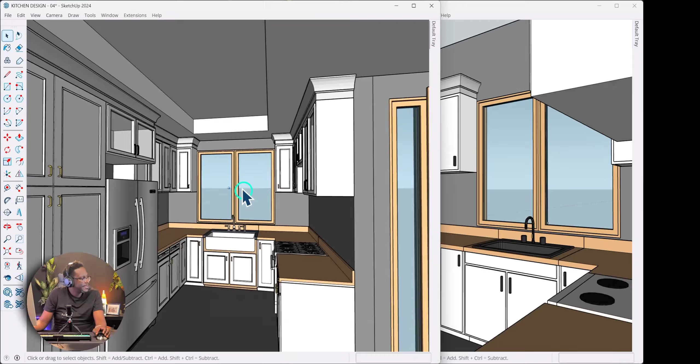The gist of this is that when you want to add fine details, don't spend years trying to do it in Revit. You can very easily add additional details because you have the power of the 3D warehouse at your fingertips. You can just go to 3D warehouse and get all these detail objects, and they're easy to add and manipulate. Whereas in Revit, you have to deal with a lot of levels and alignment and rules and that kind of stuff. Any questions from anybody, guys?

Hmm? Generally, you good? Yes, sir.

All right, now here's what I want to do, guys. I want to strike a deal with you. What we have left to do after this is stuff in Twinmotion, rendering stuff. Now, in light that you guys have a crit tomorrow, what I would propose is I could do the Twinmotion stuff next week, but that would mean everybody would have to come to class next week, because that is literally the last opportunity to take care of anything that needs to be done for the module. What do you guys think?